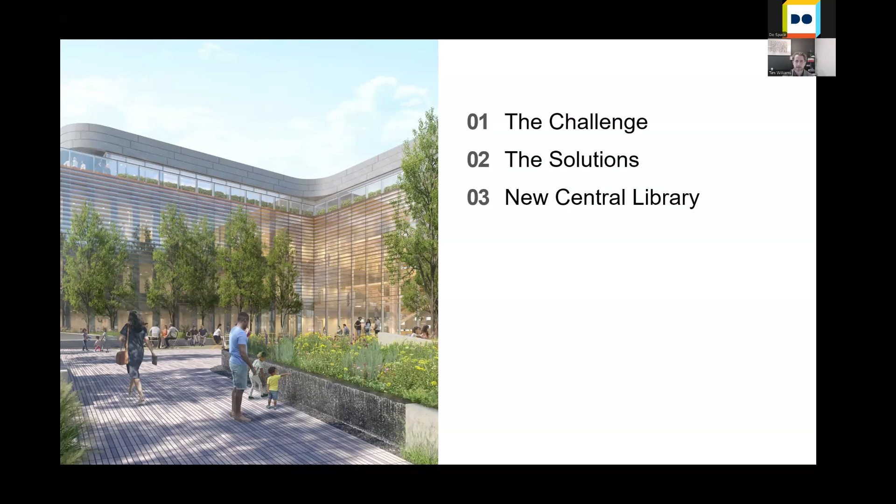So the first part is kind of the doom and gloom, what many of us are familiar with—all the challenges that come about with all of the climate issues taking place, especially in the architecture, building, and construction industries. Buildings and their operations and the materials that go in them account for about 40% of all global CO2 emissions. So it's a huge impact based on what we choose to put in our buildings and how we operate them. There's so much that can be done by further addressing this.

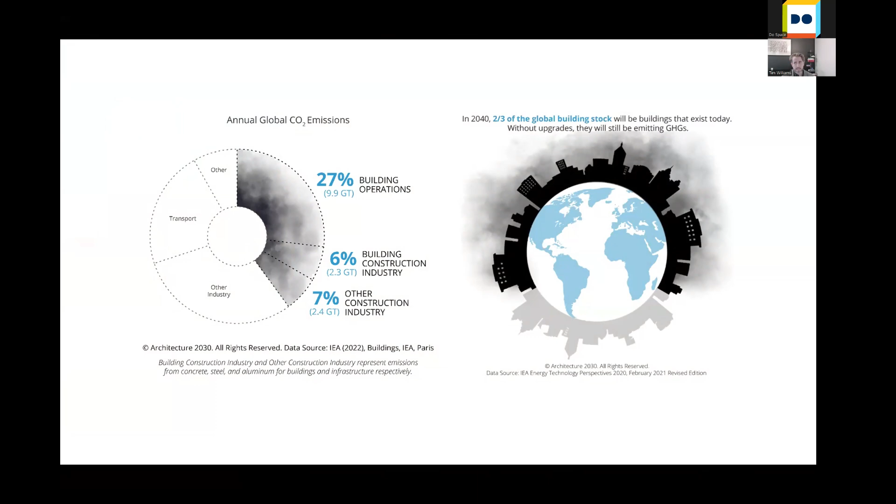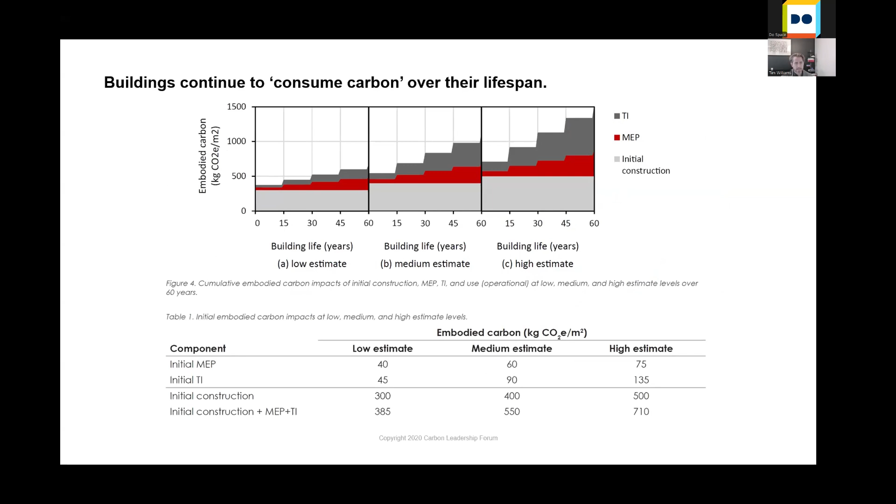Buildings even continue to consume and emit carbon throughout their lifespan. They will be renovated, there'll be new materials brought in. It can have a huge impact throughout the life of the process.

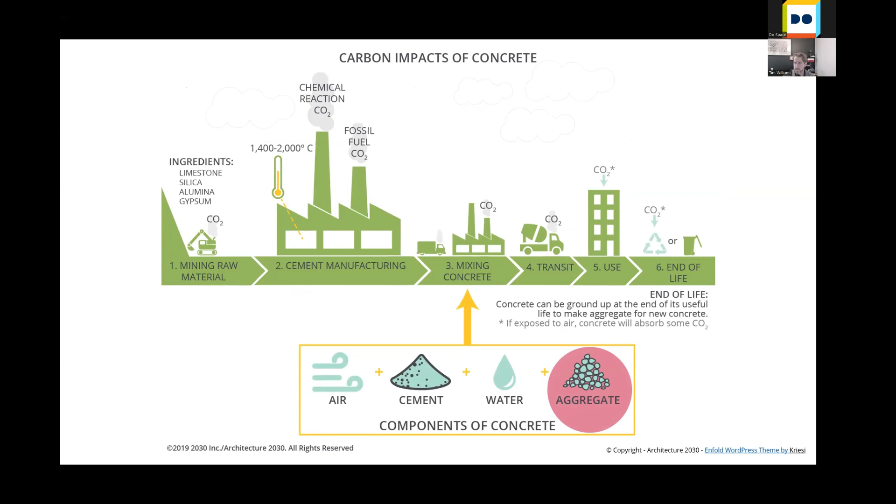Concrete itself is one of these inherent materials that's a major player in just about every building, and it's one of the largest producers of greenhouse gases. It's 8% of all global greenhouse gas emissions, just from concrete. Second to that in our industry is steel as well, which also has a big impact. Although steel is getting to a place where they now have much more efficient furnaces that allow them to cut down on some of that CO2.

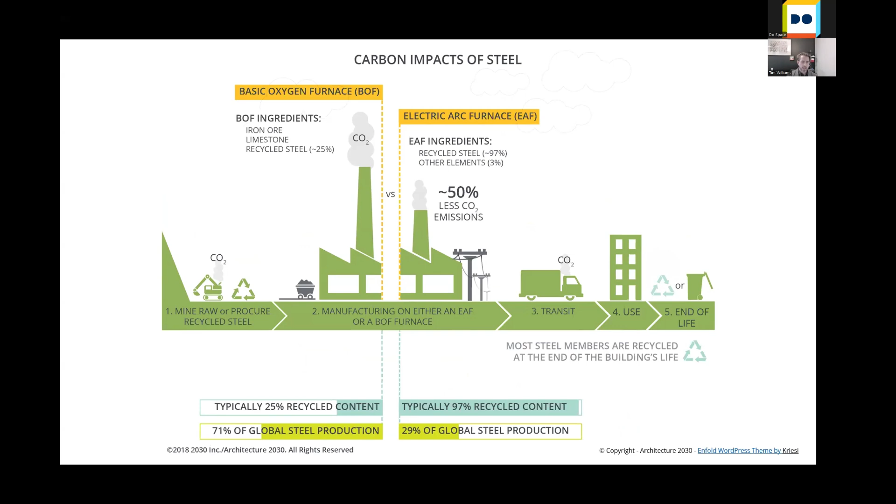So I'm not really just talking about the material itself. It's about the CO2 emitted when they mine the raw material, when they're manufacturing it, when they're transporting it, and when it's at the end of its life as well. So it's thinking about the entire life cycle of a material product.

So just kind of very high level, how we're beginning to, as an industry, address and begin to look at some of the solutions that are out there, or pathways for us to begin to correct some of these issues. I'm going to talk about three of these.

There's a lot of different standards and systems out there that speak to wellness and health of buildings and the sustainability of them. But I'm going to focus on three, the first being the AIA framework.

The American Institute of Architects is one of the big licensing bodies within the industry. HDR is a member firm of the AIA, and we're really committed to the code of ethics that they bind us by.

In the same way a doctor has an oath to do no harm, we've also signed on to the responsibilities of ambitious climate goals, optimizing water consumption, incorporating healthy materials, minimizing unhealthy ones. How can we restore ecologies and habitats? Can we incorporate resilience strategies while minimizing environmental, social, and economic impacts?

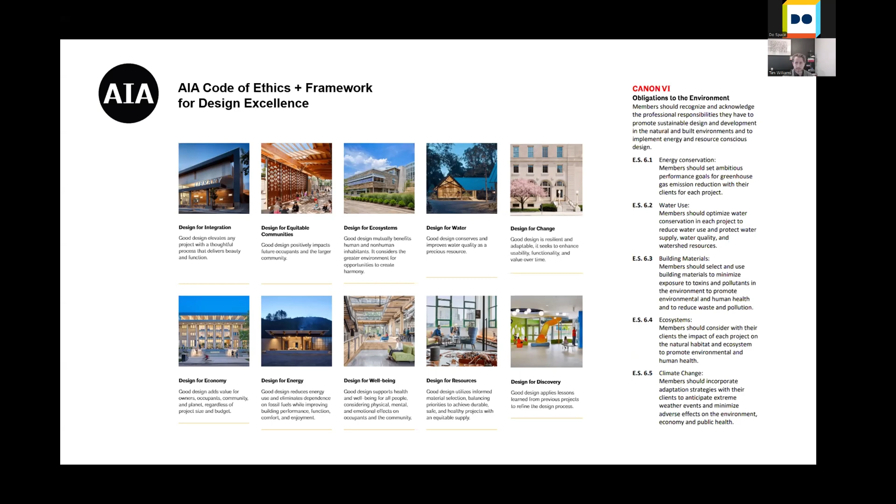The next one, at a high level, is something called net zero, sometimes called net zero carbon, sometimes net zero energy. This is about what if we could totally eliminate the carbon impact that buildings have on the built environment. A key part of that is this net zero idea: it's not about eliminating carbon from the entire project, but offsetting it or finding ways to generate additional energy on site to begin to pay back, in a way, the carbon required to create a project.

There's also this idea of using materials in a project that capture some of this carbon, not in a manufactured way that releases it into the air, but materials that are actually made of carbon and soak it up, so we can use them in the buildings themselves. They end up as a negative versus a positive release of carbon dioxide.

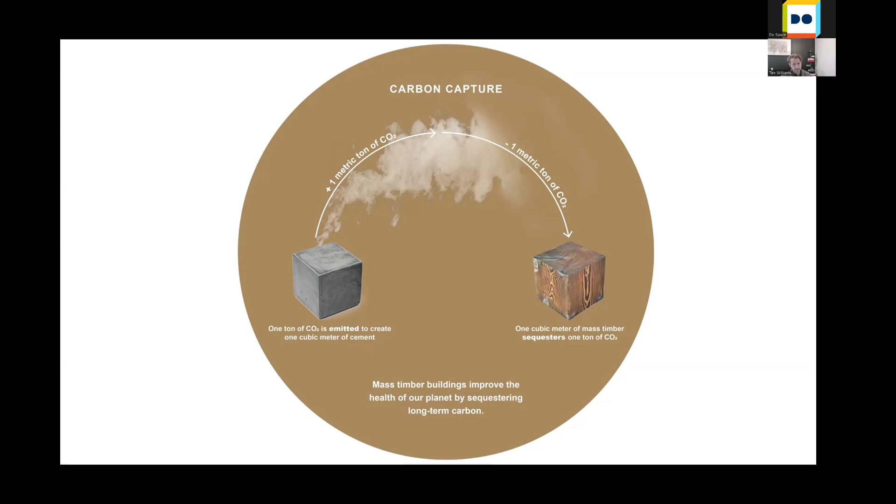One of the best ways to do that is trees. Trees breathe in carbon dioxide and output oxygen. That's how trees work, and as part of that process, they themselves are heavily made of carbon, which we can use in the building industry to create a building that actually has a negative carbon impact.

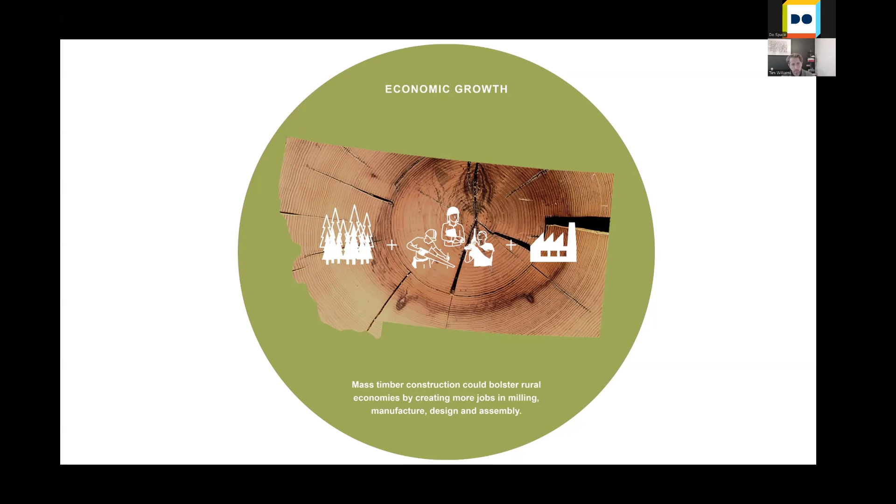The whole industry of trees and forestry is well-known, and there are sustainable ways to harvest trees. I'm not saying let's go to the rainforest and chop down all the trees there, but I'm talking about Forest Stewardship Council provisions that look at keeping forests, planting them, and using them sustainably so you can continue to replenish forests while harvesting from them.

Wood is also really interesting in that even after its life cycle, it can be reused in other ways. Many times you can just reuse a piece of wood, or grind it up for industrial processes and reuse it in different manufacturing, like OSB or particle board or paper. There are other ways to reuse industrial timber, or even send it back into power plants that can accommodate this kind of fuel source.

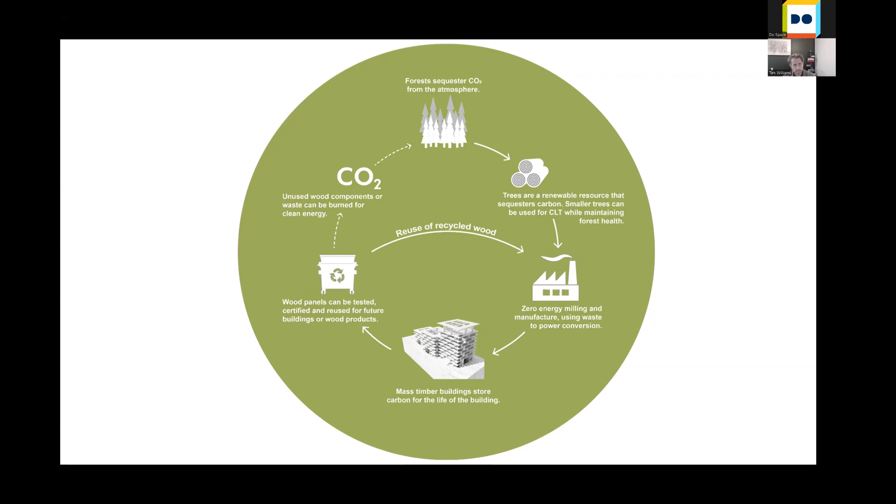And so there's even a step further beyond net zero, where you're not just balancing out but actually improving the built condition. This is the idea of a regenerative future, where you can actually have a positive impact by building a building on the site.

So many of you are thinking, hey, my house is already made of wood, am I carbon negative? It's actually a very different material in many ways. The light wood frame your house is made of is likely not the same as what we're talking about here, what's called mass timber, which is basically gluing together a bunch of 2x4s to make much larger members.

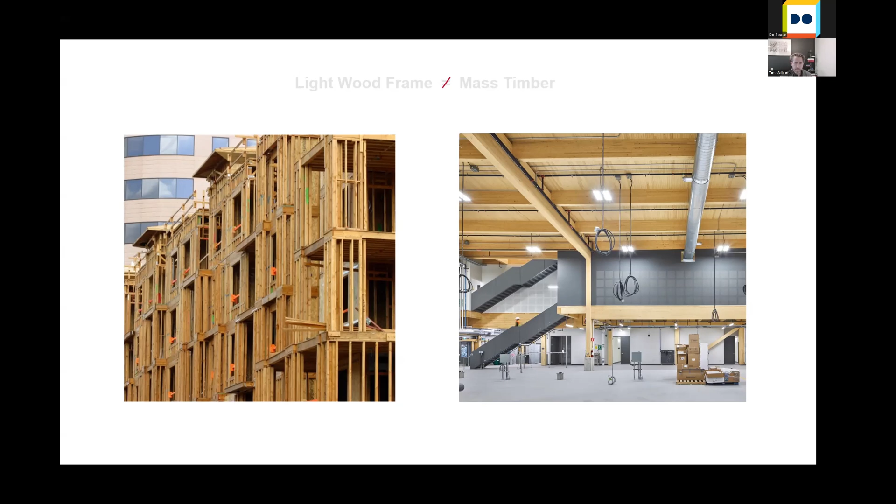And they do that to allow for the similar column-free environments that you come to expect from steel buildings or concrete buildings, to improve their structural performance. But it does also help with its fire resistance.

Fire would obviously be one of those first things, like, hey, wood burns, that's not good, right? But the interesting thing is when you get thicker with the wood, when it burns, it actually only burns that first several inches. What's left on the inside can remain as a structural element. So when engineers figure out how big a beam needs to be, they take into account this couple extra inches that are essentially allowed to burn away in the event of fire.

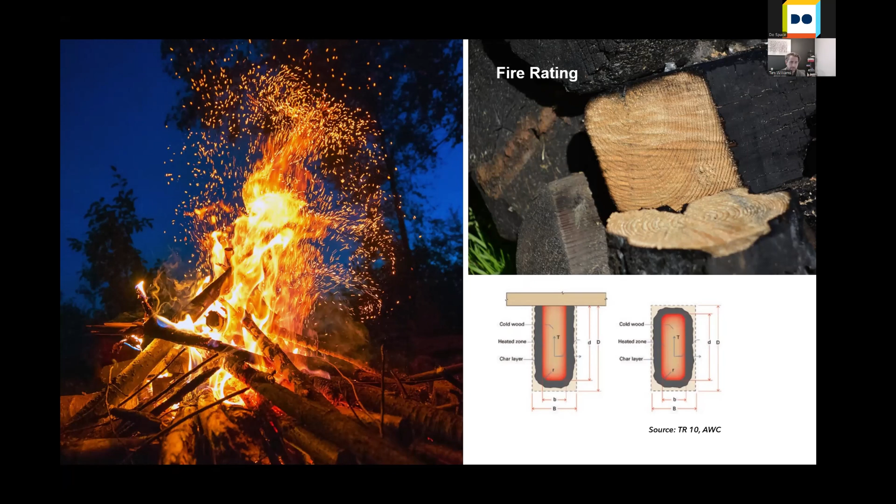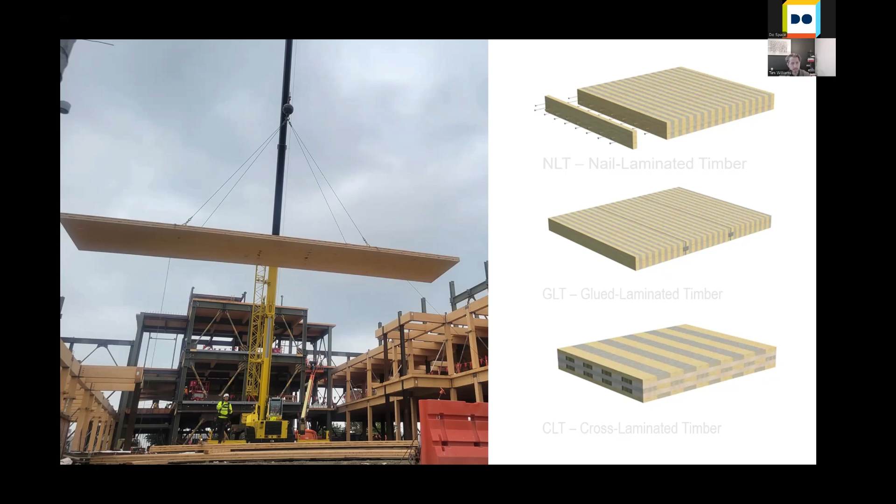So in many ways, wood can actually obtain equivalent ratings to what you get with steel or concrete buildings. And for the flat portions of the building, like the floor and roof, you can make it out of something called CLT, GLT, or NLT. These are all essentially giant plywood - huge layers of thick lumber instead of thin veneer layers you see in plywood. But they're all just more ways to take some of that carbon that would normally be released into the atmosphere, and actually embody it within the building, creating this negative carbon environment.

And this has a benefit - in many ways we still need to use concrete and steel in projects. You're not really going to bury wood as a foundation element, so we'll still rely on concrete. But timber is also quite a bit lighter when you build out the full structure than steel, which allows for lighter foundations. That means less concrete for the foundations of a building, which equals, again, less carbon.

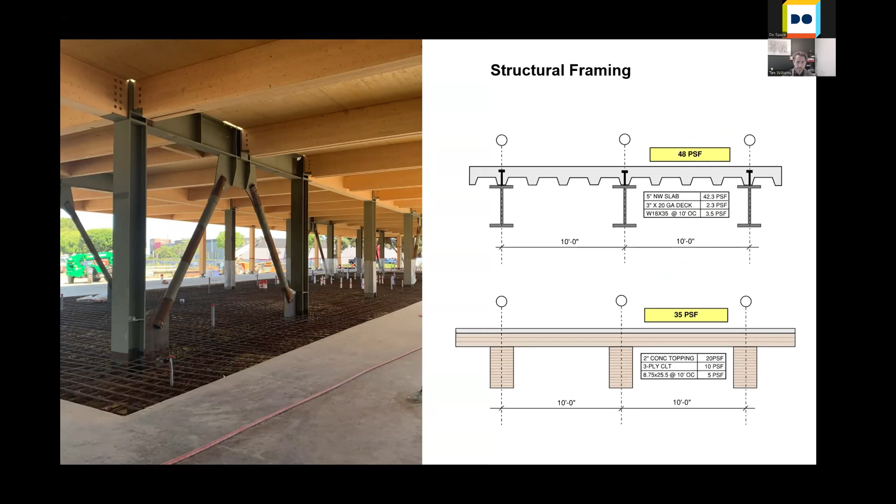So this is a kind of cool study that we did for a project. They wanted to evaluate the idea of what if we switch to a mass timber project. How do we end up? What impact does that have from a carbon standpoint?

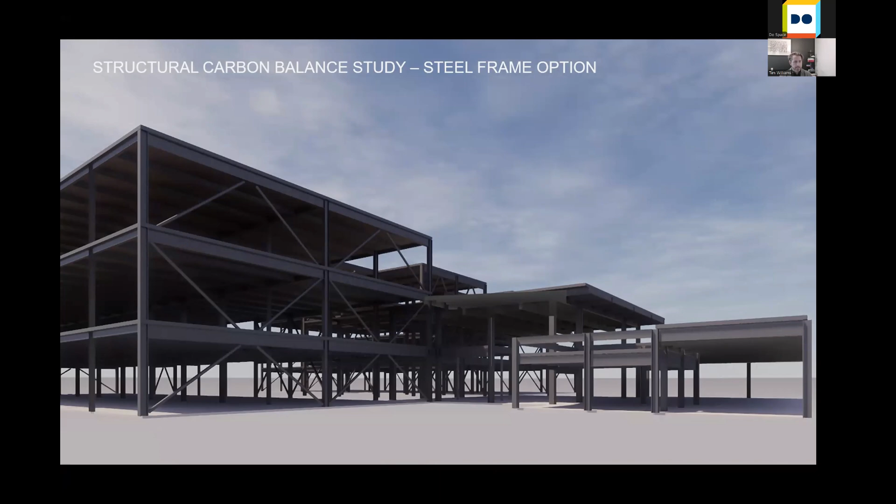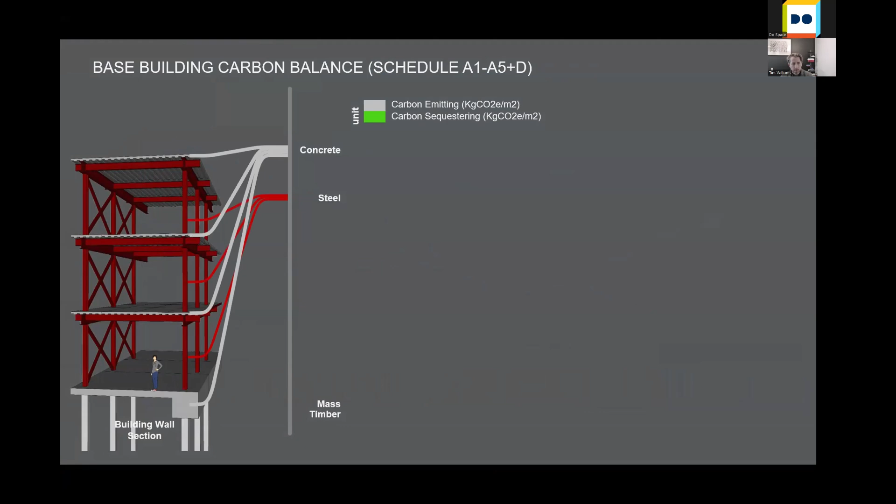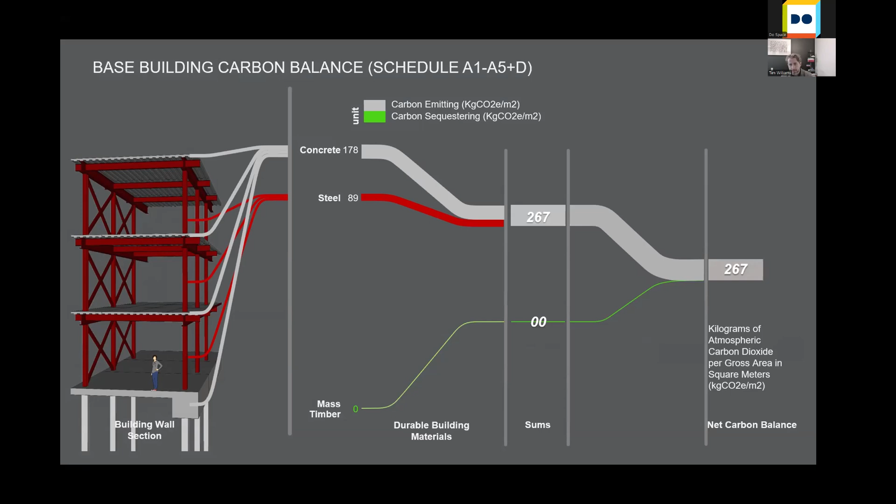So we did a base project that was just all steel, and then we looked at the carbon impact of each of those. We have carbon embedded within the concrete, carbon within the steel, and those each have a certain amount of kilograms of CO2 that add up to create this number - for reference, 267.

And then we went to evaluate what if we switched to this mass timber scheme, where we use a majority mass timber, but still using steel elements where required. This project was in California, and they have earthquake provisions there that in Nebraska and the Midwest, we mostly don't have to deal with. That's why there are these steel members, which could not be done out of mass timber at the time.

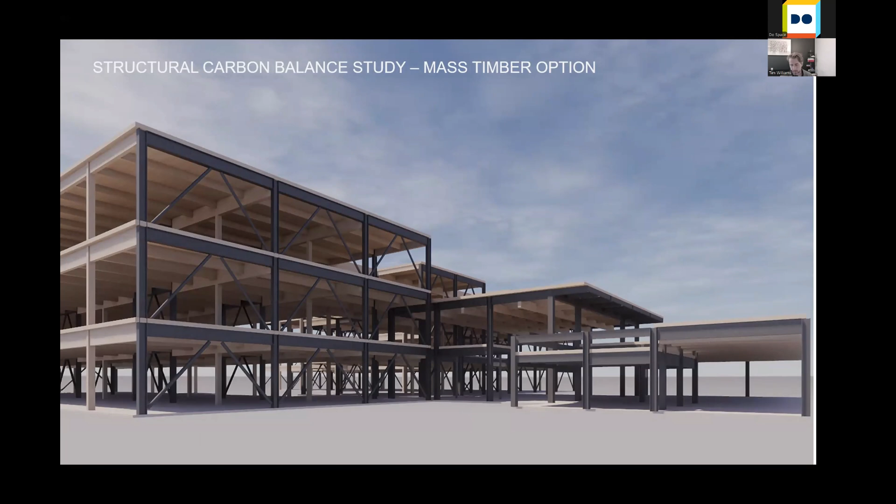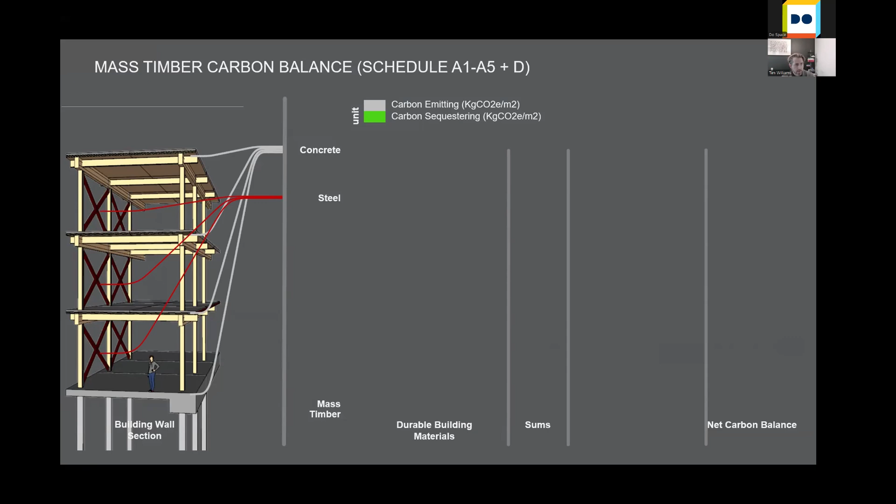When we began to really look at this project with mass timber, we still had a little bit of concrete. Mass timber usually has about 2 or 3 inches of concrete on the roof, on the top of the floor, and on the foundations, as I said. There's also some steel still left over within various miscellaneous areas. But then there's all of this carbon that's captured by the wood itself.

And when you really end up doing the math, the project actually ended up netting out to this negative carbon impact. So by building the project, it was actually resulting in absorbing more carbon into the built environment rather than releasing it into the air.

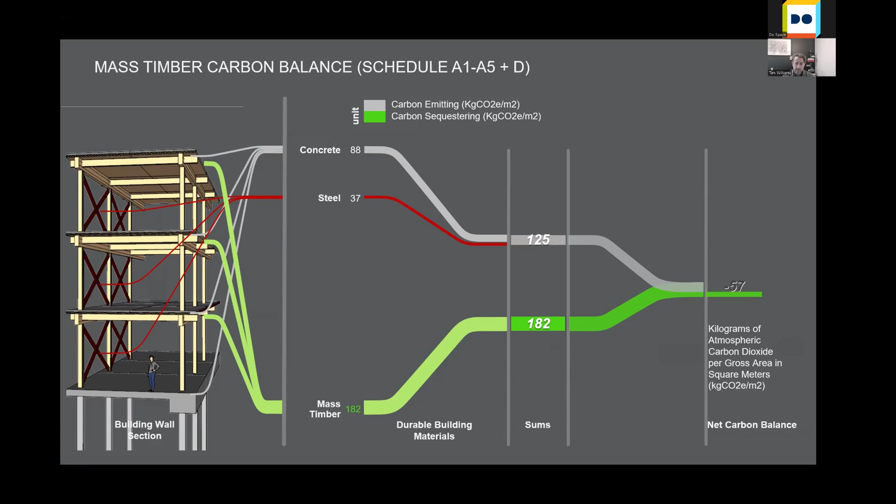And we're fortunate in Omaha to really benefit from some of our colleagues up in Canada and the Pacific Northwest, where mass timber is a very common way to build and incredibly cost effective. They've done over 70 projects, and we've been fortunate to really tap into these industry experts and utilize them on some other projects.

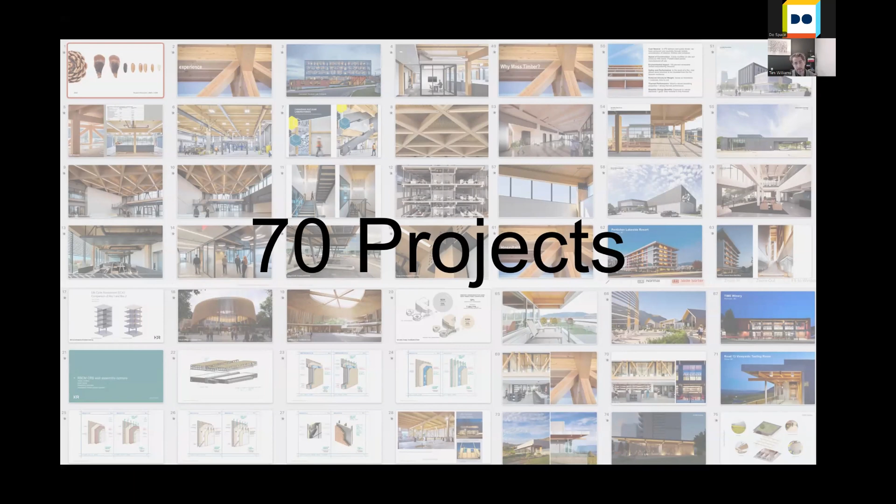So recently, we were given the opportunity to do an addition to the College of Architecture at the University of Nebraska in Lincoln. And as stewards and educators ourselves at the college, teaching this future generation this kind of - I'll say new style of building, but really it's a very traditional way of building - mass timber was a perfect example for that.

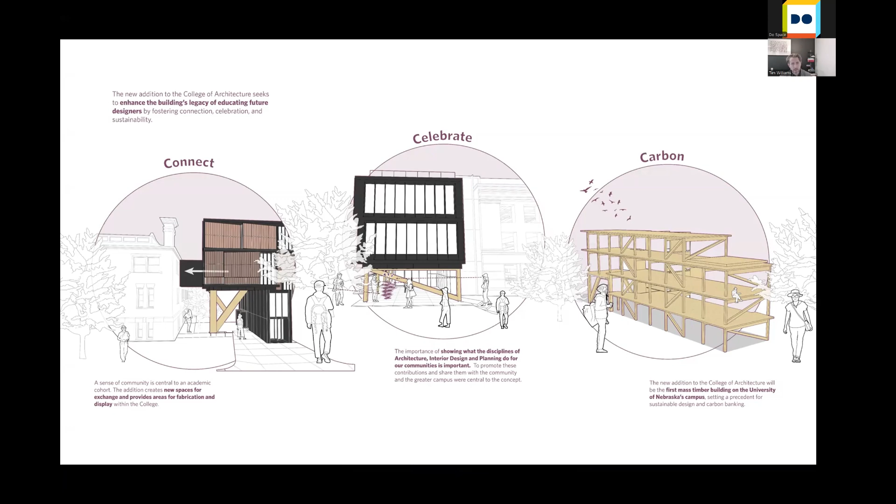So I just want to share some of these projects that was recently completed. I'm sure many of you have walked by it on the way to the football games. It's a small addition, but very impactful and has a huge presence on the site.

One of the benefits of mass timber as well is it has a faster erection cycle. So you can essentially build a mass timber building faster than you can a steel or concrete building. That was a huge bonus for the university because they have deadlines - students coming in at a specific day in the fall, and you need to have the project complete by then. So having a fast construction schedule really helps with that.

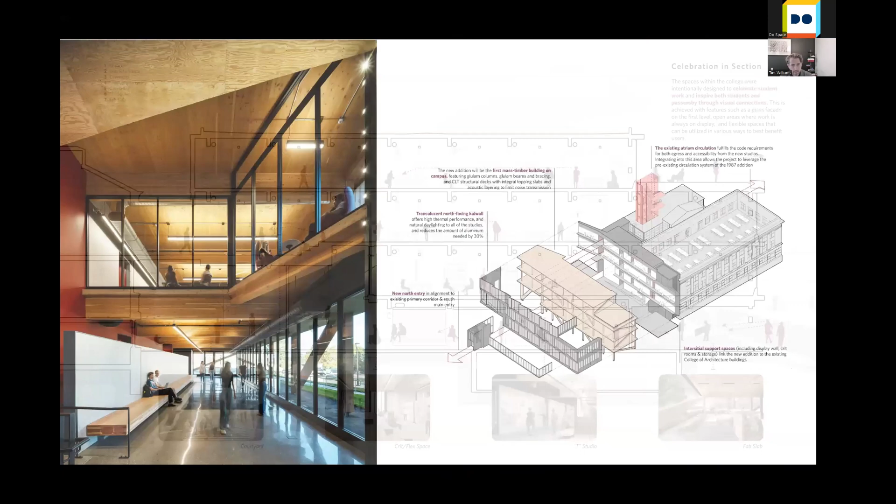And I think one of - I've just been talking about the carbon impact of mass timber, but it's also a really beautiful material inside of a space. We often can just leave it exposed. You're not going back and painting it and putting drywall on like you usually do with steel and concrete or other structural materials.

And we completed one in downtown Omaha just recently at 1501 Mike Fahey. This one is a commercial office building, so it's not an experimental architecture building. This is a real world project that really saw the benefit of investing in creating mass timber portions of the building. So the lobby and some of the ground floor spaces and the perimeter columns are all mass timber. It's an incredible environment.

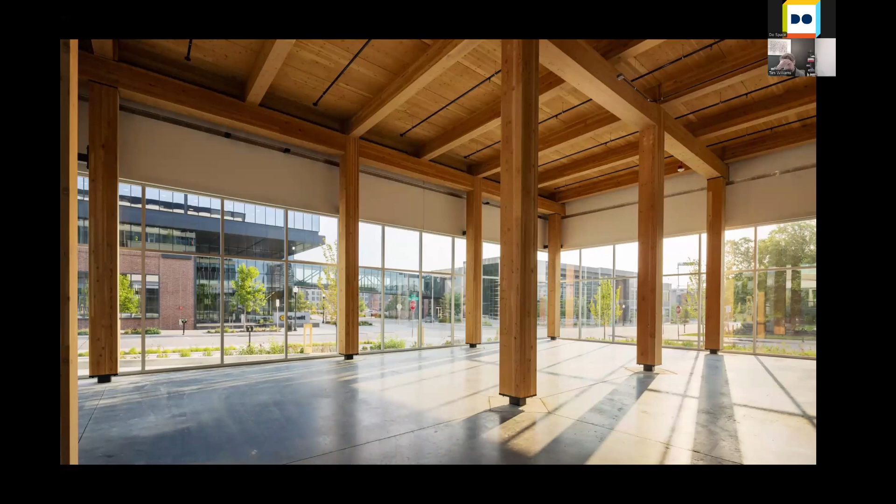So the last of the systems that I'm going to talk about is called LEED, Leadership in Energy and Environmental Design. It's a system set up by the USGBC, a private organization that has advocated for sustainability and certification of individuals and projects to promote sustainable buildings. It does say USGBC, but it's actually a worldwide organization. They certify projects all around the world, and they really are the leader at the moment in terms of the standard for creating sustainable buildings.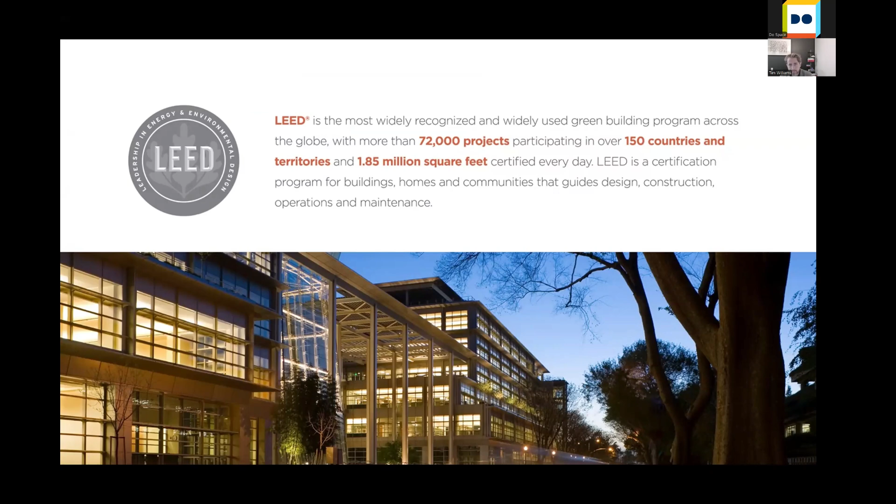It continues to reinvent itself. They're on version 4 now, so they continue to evolve as codes evolve, as the law evolves, as the entire practice of architecture evolves in building and maintenance. And they break it out into five different rating criteria: BD&C, which is building design and construction, interior design and construction, operation and maintenance, neighborhood development, and homes.

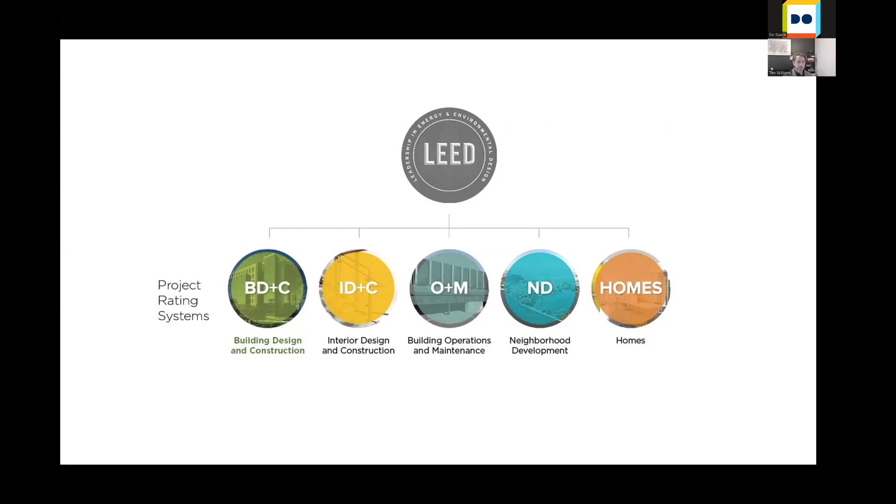And so if a project is pursuing it, they're usually going after just one of these rating systems. Within each rating system, there's a range of categories that you can earn credits within each of them. By earning credits, more credits equals more sustainable in a high level sense. So they call this a scorecard, and it's essentially a yes, we're achieving this credit, no, we're not. And you add up the points in the end to begin to see where you're falling.

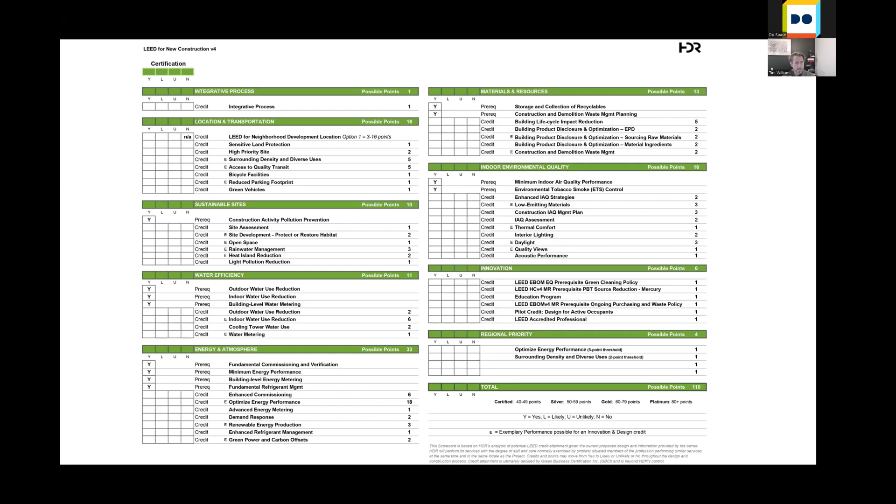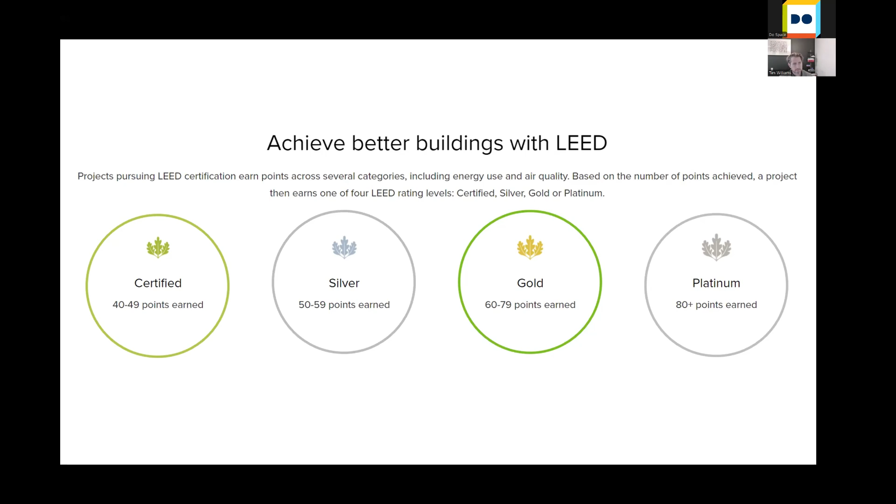So, for example, our headquarters building that I'm in right now in Aksarben in Omaha is a LEED Gold project. Let's go to this slide. It's a rating system of four different levels, with certified being the lowest number of points you've achieved. Silver, gold, and then platinum are the kind of exceptional projects. There's very few platinum projects in the state of Nebraska, but I did see that there's about 90 projects in Nebraska that have achieved certified or above, which is pretty good. And so our headquarters, as I was saying, achieved LEED Gold through this same kind of process.

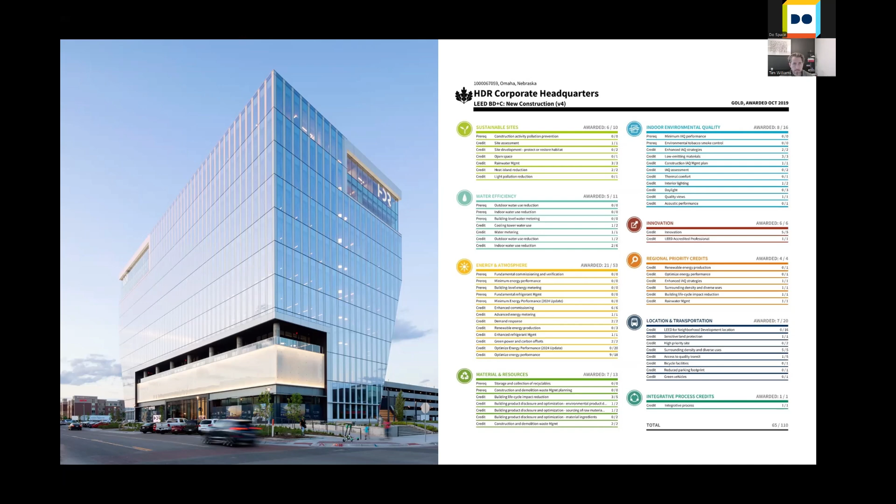And you can go online on the USGBC website, and you can search for other projects nearby. You can pull up their scorecard and see how they achieved their rating. And at the end, when you get it, maybe you've seen these in some buildings, you get this kind of little plaque that's often hanging in the lobby where everyone can see it.

And so that brings us to where we are, the new Omaha Central Library. We've learned about rating systems in general, strategies for building more sustainable projects, and LEED, and that became the primary system that we decided to strive for on the Central Library.

So the Central Library is, at a high level, a project to relocate what was the Central Library in downtown Omaha and bring it to essentially the center of the city at 72nd and Dodge, using the site that was previously occupied by DoSpace and Borders before that. So it's bringing this DoSpace, which was essentially almost an Omaha Public Library branch though not formally, and making it part of this project as well—moving the administrative portion, creating this new central administrative branch, and wrapping in DoSpace within that as well.

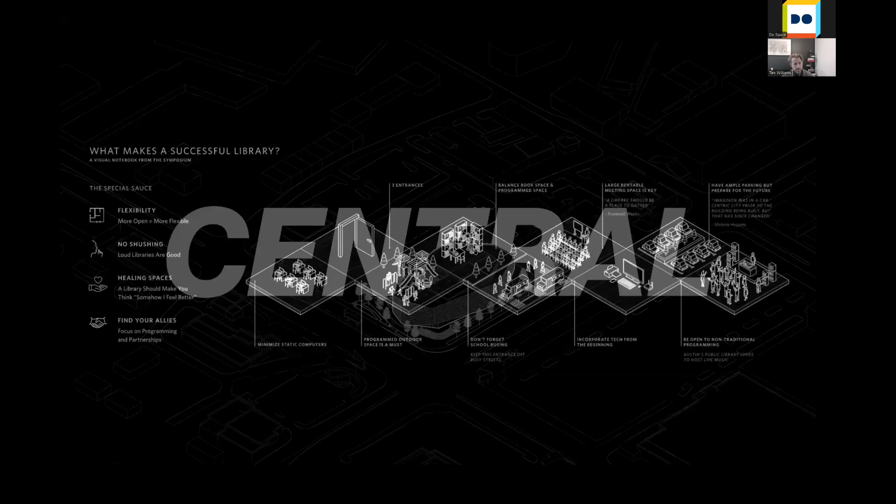And it's a project to also redefine what a library is. Libraries have changed a lot since probably our last library in Omaha was built.

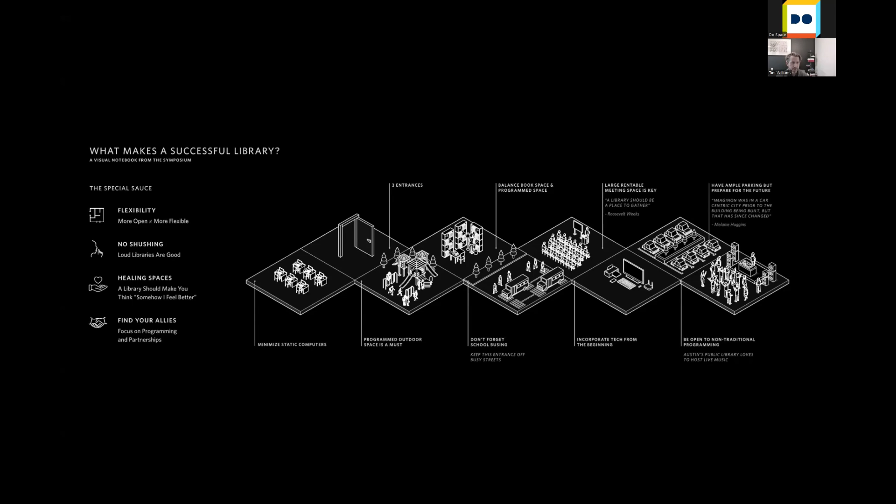They've changed, and they're not really about the kind of spaces where you're just hushing people and saying be quiet and going off to quietly read. That's not the only thing you're doing, but there's a huge range of diverse media that people are consuming and sharing now. They've become the community spaces where people can come together socially in a public forum. It's really kind of the living room for the city, with literal couches where you can come sit down and have a coffee.

72nd and Dodge has also got an interesting past that sets up for an interesting future. By placing the building here, it really set out from what was taking place, what the library was looking to move their administrative offices to somewhere around this area. This is a really interesting site that allows for more public engagement, especially putting it on such a prominent corner where there's a lot of activity.

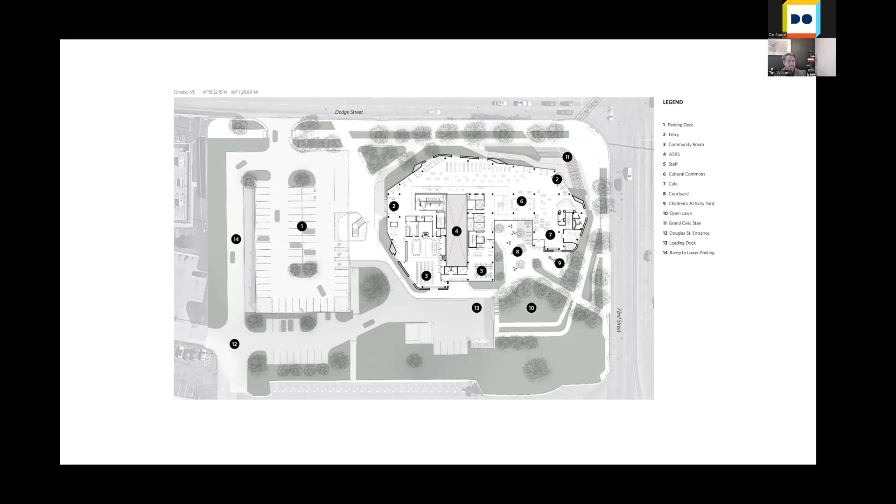I know the DoSpace folks, you all know it really well. We've really been looking at creating a building that not only sets out to have a totally new interior and programming, but also the outside reflects this totally different take on what a library could be, to reinvigorate and add this kind of spark to what's possible inside, and redo your preconceptions you may have.

Of course, a huge part of libraries is also making sure everyone is welcome. It's truly a place where everyone can come in and find something that they're interested in. There are so many different types of spaces within here that I think there's something that will make everyone find their own spot.

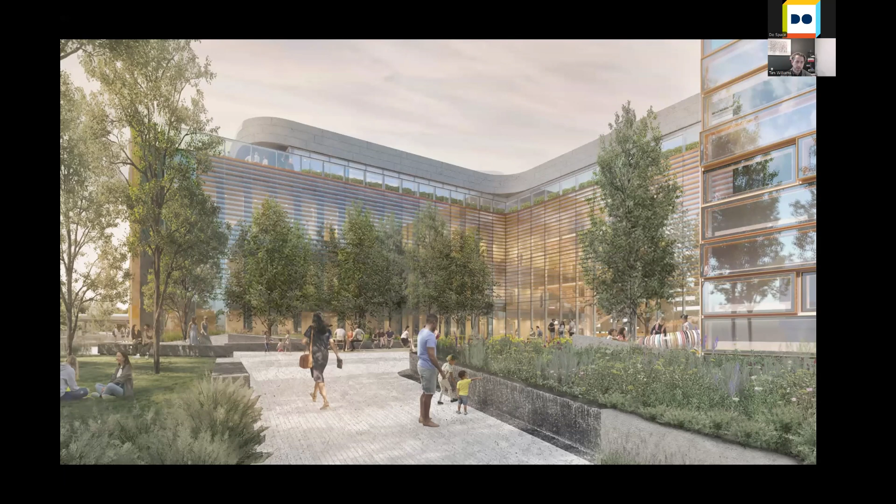And there are spaces that are outside too, not all of it's inside the building. There's a courtyard on the south side of the building that will allow for more of a plaza experience, as well as an outdoor children's playscape, and even a grassy terrace for people to have outdoor reading events or just meet some friends.

There's this really interesting aspect that it's also kind of a first. The library has taken this idea about utilizing new technology, something called an automated storage and retrieval system, which we often call the book bot. It's actually two giant robots that store books on shelves within the heart of the building.

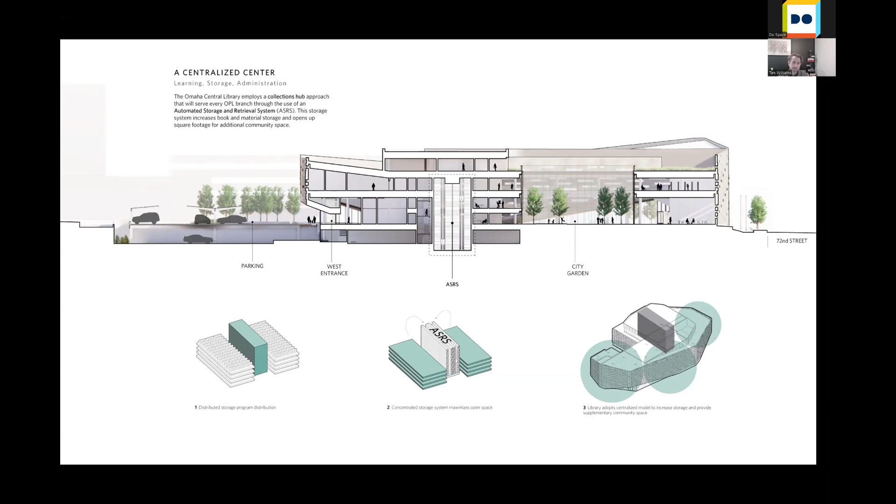This is really a place for them to store books that aren't frequently visited or checked out, but it also allows for rapid retrieval of books if they are called up. So within several minutes, you can call up a book on one of the devices and have it available at a counter for you to reach.

This is one of the systems in place at the Hunt Library in Raleigh, where they were using a series of these book bots to store their books and other media. The Omaha Central Library is going to be the first public library to have a system like this, although it is widely used in university libraries across the country.

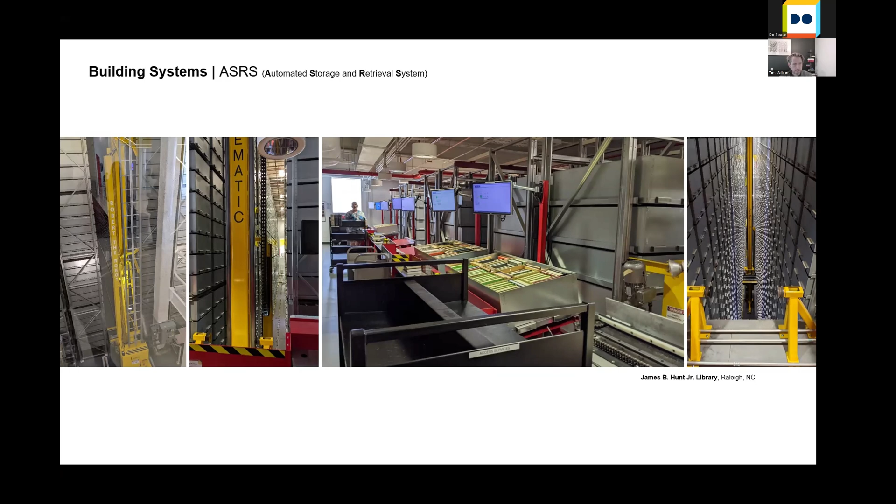It's also very popular in many shipping and storage warehouses. But what it also does is allow us to build less of a building. If anything you've learned so far, it's that building any square footage usually results in a less positive impact on the environment. So by condensing all of this to a smaller footprint, it's allowed the building to be smaller, because we don't have rows and rows of archival shelves that aren't accessible to the public, but instead something in the heart of the building that people can get to.

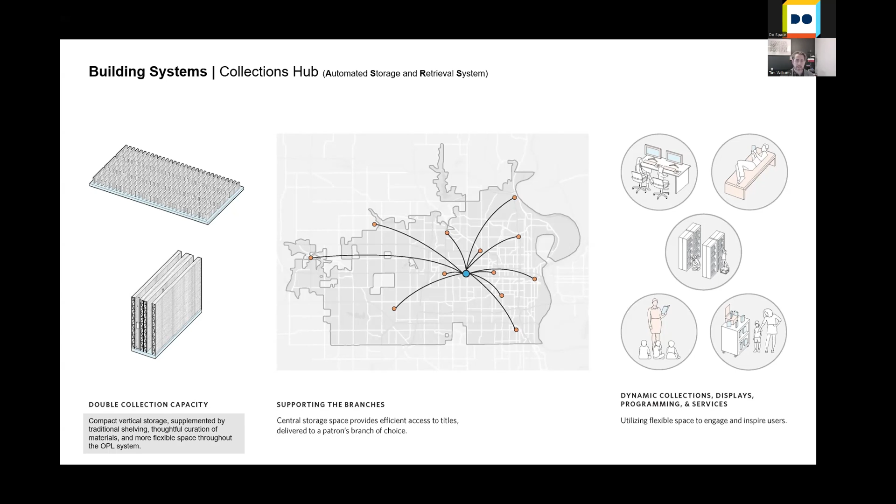It also has the added benefit that now the other branches are able to store some of their stuff in the central library, which frees up space in each of those branches, allowing them to create more of these dynamic programming things that are in demand. When you bring it all together, it creates this really interesting free space available for different events that can take place at the library. So the ground floor, the first floor, still has books, still has plenty of books out to see, but it also has a lot of open space. So speaking about the living room of the city, it allows the first floor to be like that.

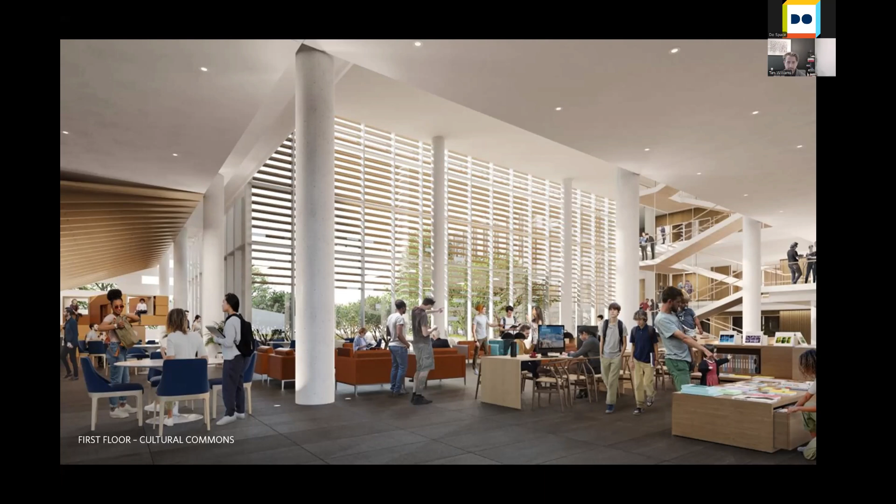So when we think about LEED and how LEED applies to the project, we are going down the building design and construction path, so that's essentially new buildings. I'm going to talk through some of the different categories we're targeting to get credits from.

Location and transportation is one of the categories, and we're benefiting from access to public transit. Omaha doesn't have a lot of public transit, so building a project adjacent to these stops really helps us, especially for LEED credits. With the ORBT bus stops on Dodge Street, that really helps tie into more sustainable ways of accessing the building.

Additionally, there's plenty of bicycle facilities available for people arriving by bike, and EV charging will also be available. We have a reduced parking footprint, so there's a small parking garage with a reduced footprint compared to what's often seen, and we benefit from the diversity and density of the surrounding area.

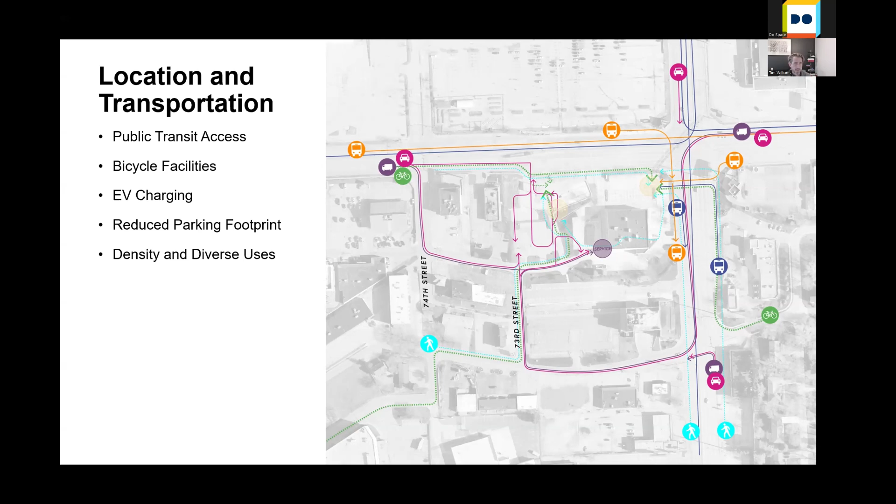One of the positive things is there's so much happening in this area. You can walk across the street and find Chipotle, Starbucks, a Target across the street, and other businesses nearby. So within a close area, we're able to obtain some LEED points by having a project like this. A lot of these things aren't really our decision as architects, but they do benefit the project by choosing sites such as this.

Energy and atmosphere—this category brings the most points to our total score. It has 33 possible points that you can achieve, and a big part of that is the energy efficiency of the building.

Right now our project is achieving 16% lower energy use than the Omaha code. We've reduced the energy usage required through a variety of strategies I'll talk about. We've reduced natural gas consumption by about half, and we're even beating the LEED baseline building by about 30%. We've spent a lot of effort to really improve the energy efficiency of the building in a variety of ways.

We also have commissioning, where experts come out to ensure systems are set up correctly—is your mechanical system actually functioning the way it's supposed to, is the exterior of the building leaking air, or is it performing the way it was designed to. This helps get the building set up properly.

We're also targeting the enhanced refrigerant management points, which is about more efficient use of refrigerants. The challenge there is refrigerants are often very harmful to the environment when released, so keeping them reduced is essential.

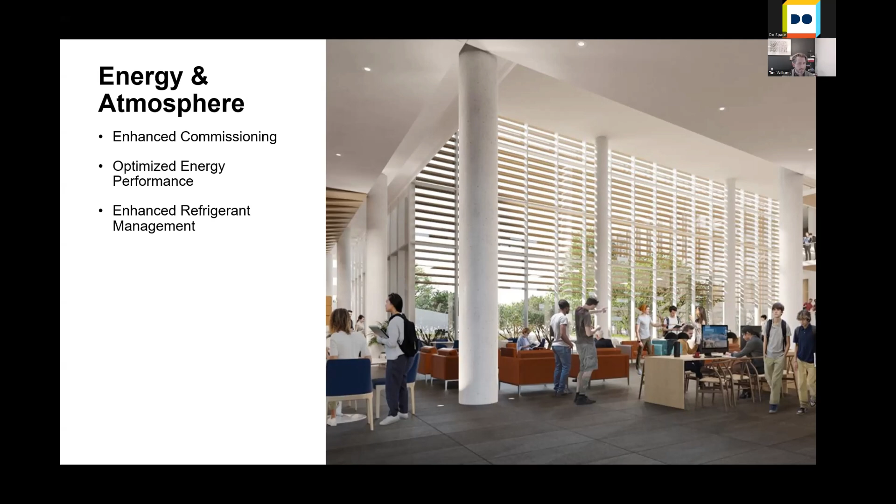A big part of that, and a really unique thing on the project, is this underfloor air distribution system. We have a lot of very big volumes within the building, part of creating that public space feel, and a high ceiling makes it very difficult to deliver cooled and heated air down to someone on the ground. But a very efficient way of doing it is by actually feeding it from the floor itself.

That allows for little adjustable grills on the ground that can be tweaked or changed so people can adjust the air distributed to them if they're not feeling comfortable—just like in your car, you can turn off the little fan if it's giving you too much or too little air. It's the same thought, but it also has a huge benefit to the library and the way they want to operate and run the space. It allows for more flexibility.

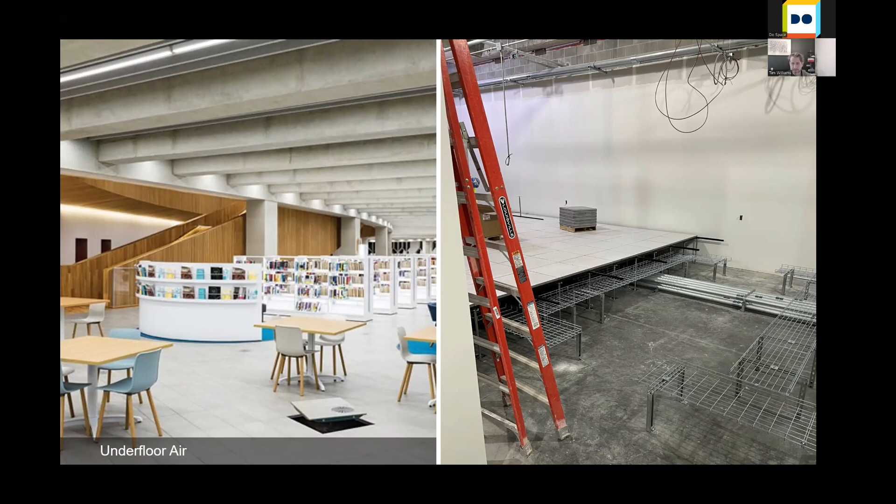So it's a very sturdy system, which is something that one may not intuitively think.

Another huge benefit to the energy performance is what happens on the exterior of the building. For all the vision glass on the building, all the windows, we're using triple glazed glass, meaning there are 3 layers of glass with cavities of air between them. That allows for much more efficient energy performance of the building. You're not losing heat through it in the winter, and you're not losing your cooled air in the summer. It's really keeping the outside where it wants to be.

It also has a really deep, thick facade that allows for additional insulation and also provides some shading on itself. So it's kind of shading even before the light gets within the building.

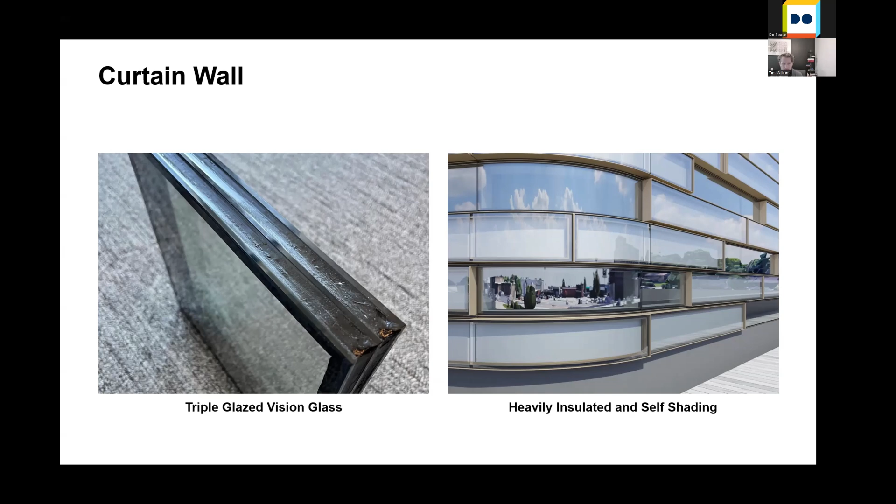It's an incredibly unique facade design that, if you've driven by the site, you're beginning to see. It's really a collection of these small windows combined with another layer of glass on the outside to give the effect of this kind of morphing glass building, which is also really important in how we provide natural light inside.

Providing natural lighting is also some more credits you can achieve if you obtain a certain score, reducing the glare inside. We've designed some sunshades that go on some of the big open glass areas that face south, to cut down on any glare coming inside. And then quality views is another area where we're targeting some LEED points, so we want people to look outside at good things.

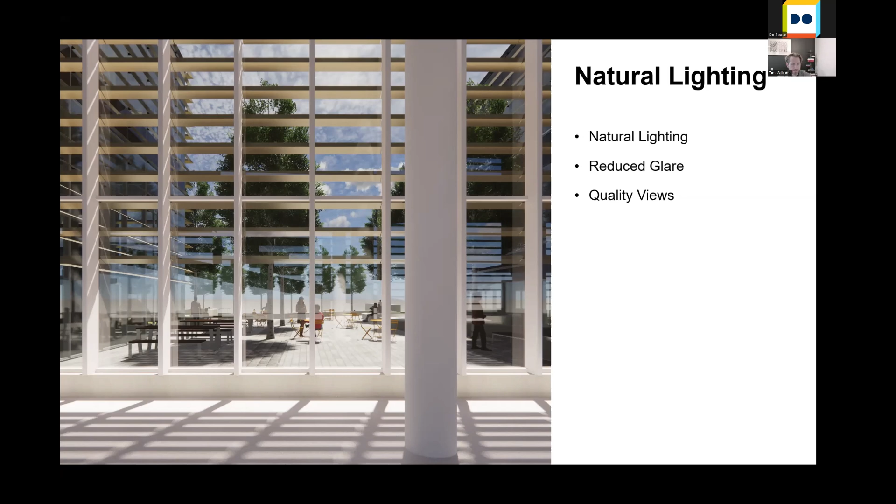Each of these things isn't really just like, yeah, that looks good, I think we're there, we'll check that box. They are actually really rigorously studied, and we have brilliant engineers working on things like this to look at and evaluate different design options and how the building is performing from all of these different metrics.

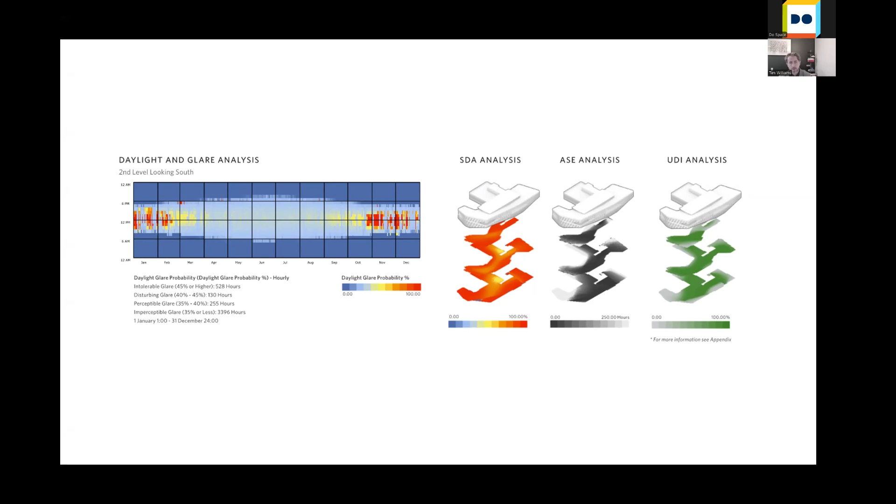So how much can the building stand without needing any artificial light within it? Or is it obtaining plenty of light from just the outside? Or is it getting too much light from the outside and we need to cut down on some of it? These are all really key metrics that we track throughout the project.

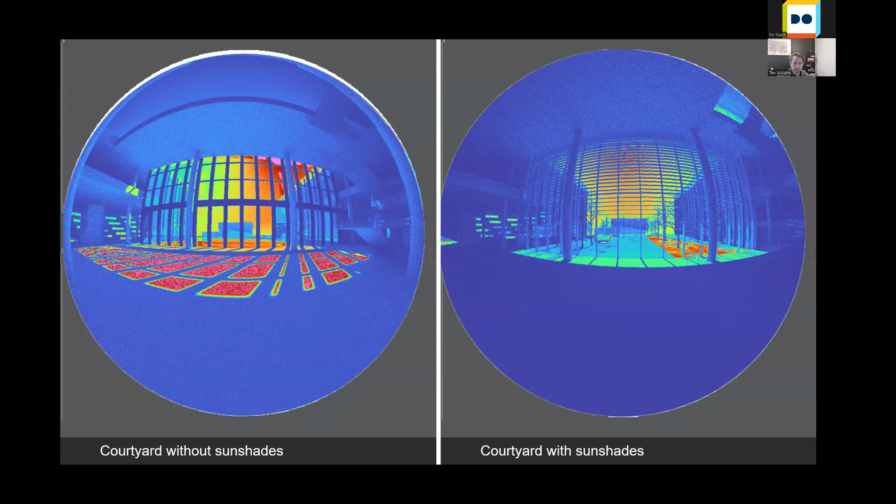We evaluate different design decisions, such as the sunshades I was talking about. We looked at first not having them, as you can see on the left, but it made these areas basically going to be cooked if you were sitting there for a long enough period of time. In the summer it might feel really warm, but by adding just these small sunshades on the outside, it's really cutting down on the glare that comes within the building.

We evaluate it in a lot of different software. This was very early in the project, but we continue to use it throughout.

It's also important to provide the ability for people to move throughout the building and live an active lifestyle. By having publicly visible stairs within the project, you can obtain LEED points for that. It promotes people's own health for those that are able to use the stairs, but it also cuts down on elevator electrical requirements, so you're having less impact there but more activity here. And it's not just about the egress stairs, the escape stairs surrounded by concrete block, but about putting stairs in big visible public spaces, so you can walk around and see other people walking around. It creates this kind of visual connection and ease of transiting throughout the space.

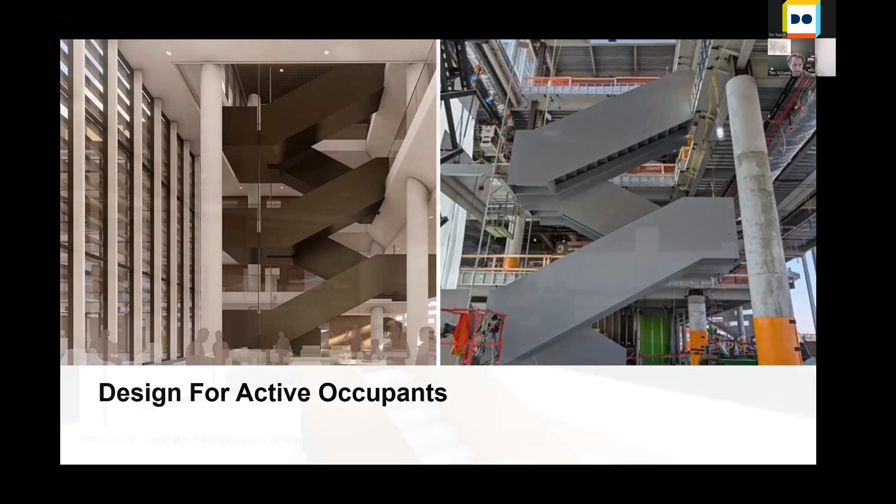So even the stair, some of the materials we've been looking at are also these kind of tactile materials such as wood, to promote and really try to encourage people to use the stairs for those that are able.

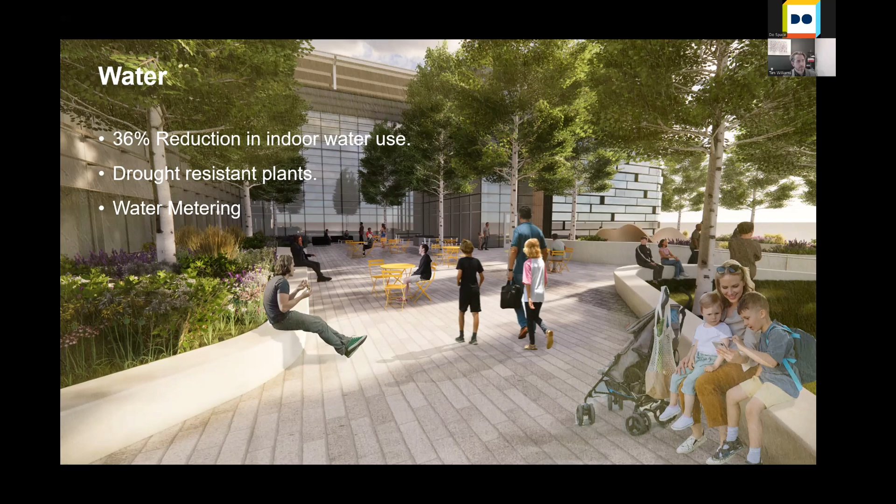From a water perspective, I don't want to show any photos of toilets, but it's a key aspect of actually achieving water reduction by having really efficient fixtures throughout the project. Efficient toilets, efficient faucets, all of these help contribute to a reduction of 36%, which is where we're at right now. On the outside of the building, we have drought-resistant plants, which really cuts down on any irrigation required throughout the project. You also get credits for metering your project.

Here's this kind of outdoor green space I was talking about earlier. A lot of native plants throughout the garden means they don't have to get out there and water it as much, a lot less maintenance, but also can be really beautiful.

Back to the inside, some of the key impacts we can obtain is by choosing low emitting materials. That means VOCs, or volatile organic compounds, which are essentially slightly toxic fumes that are emitted. We all know the feeling if you've unrolled a new carpet or something like that, these smells can have a negative impact on our health. So the design team specifically chose materials with low VOC content, which is a big part of creating environments that are actually healthier for people inside.

And EPDs, or environmental product declarations, are essentially forms that material product manufacturers create, and you can actually go search for them. You can search for some carpet supplier's EPD and their global warming potential, and find the kilograms of CO2 that each product releases into the environment. So all this data is actually out there. By using these EPDs and having everyone submit them for almost every element on the project, it allows us to better track and understand the implications of choosing different materials.

So that's kind of throughout the interior. There's a lot of wood, which also relates back to the earlier points about carbon sequestration and reducing environmental impact, that plays a big part in it.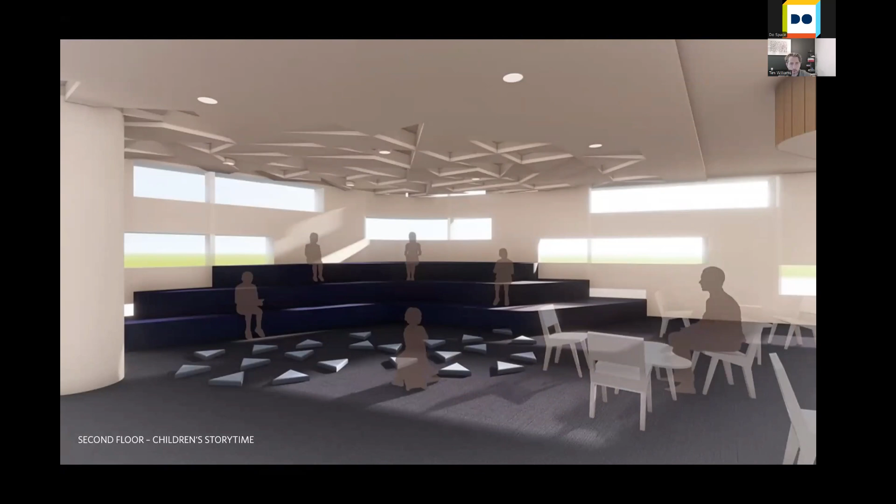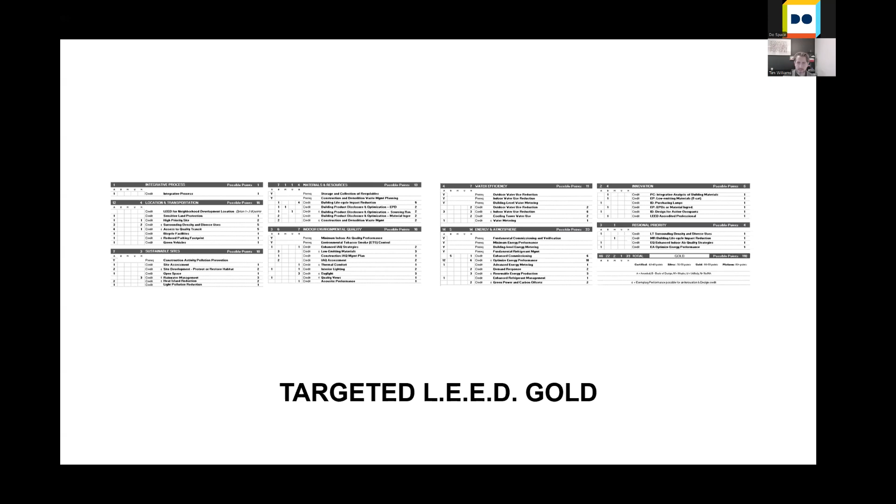So we are targeting LEED Gold. I say targeting because it's never really done until the project is totally complete and they've come to review the project itself. We're hoping to achieve LEED Gold, and we are on target to do so. A lot of the project is complete, so I'd hope that we're in good shape at this point, but I don't want to jinx anything.

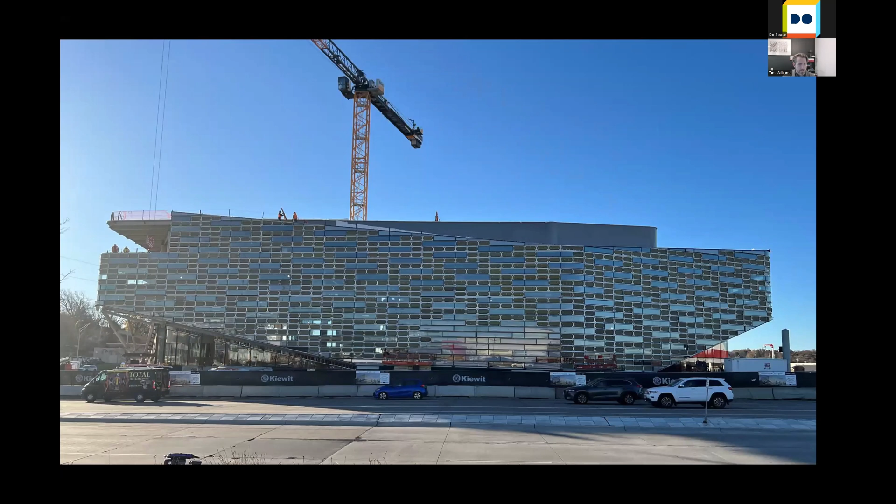We've been excited to be involved in this project, and I just wanted to share some images at the end. So these are early computer renderings, but I just walked by a couple days ago and it's coming to life. It's really cool to see them beginning to quickly put this curtain wall on. Things changed just in a couple of weeks, and I believe they're going to be wrapping up the entire curtain wall before Thanksgiving.

Some more views of the project as we look from the west at the entrance. I like these kind of aerial views. You can begin to see this is the southwest corner of the project. The parking garage is to the left, and in the bottom middle is the book drop - there's a window there for drive-by dropping off your books or picking up books or maybe even 3D printers, whatever you need.

A view of the south. As I mentioned, some of the glazing is much more open, so looking out at the views of the courtyard and the nature outside is an important part of creating that experience. But here you're not seeing the sunshades - those won't be put on until the very end.

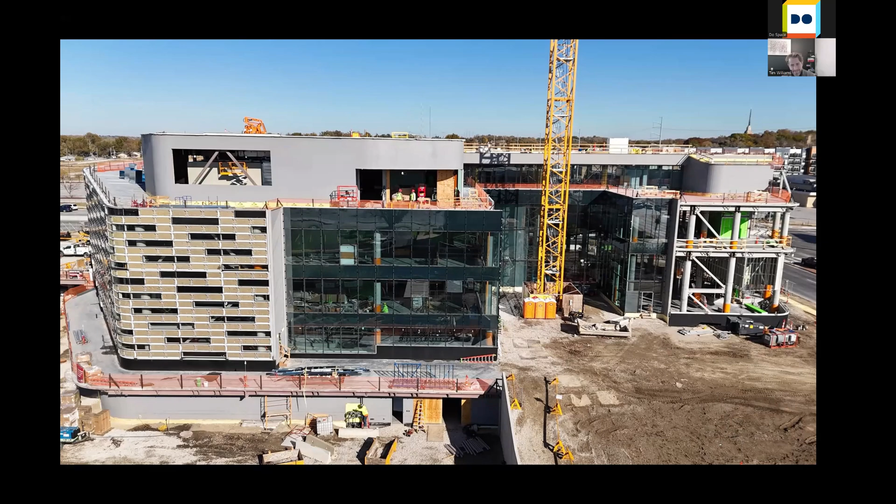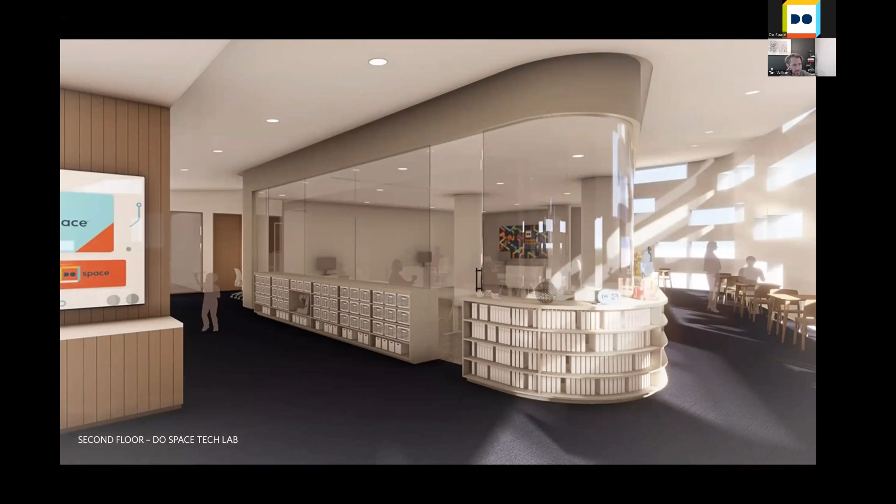I just wanted to finish with a photo of DoSpace's future home, the maker lab here in the center, which I think is going to be an awesome space. Really excited to go in there and see what you guys got.

I also should thank the rest of our team - this is not just myself and Michael doing the whole project, but a huge team that's been involved. The Omaha Public Library Foundation, the City of Omaha, and DoSpace have been huge members of the team and really great to work with. Really enjoyed the process. APMA has been the interior designers, Margaret Sullivan's studio is the library master planner, Kiewit is doing the construction, and Rainwood has helped us as the client advocate, client representative for Heritage Omaha, who's been leading the fundraising charge on the project.

Hopefully you've learned about the challenges we face as a society, some of the strategies and mitigation we can do to address it, some introduction to LEED, and how we've begun to implement it on the library. Thanks.

Thanks, Tim. That was amazing. I learned something - I kept hearing about LEED, but I wasn't sure exactly how it worked. It was great to hear.

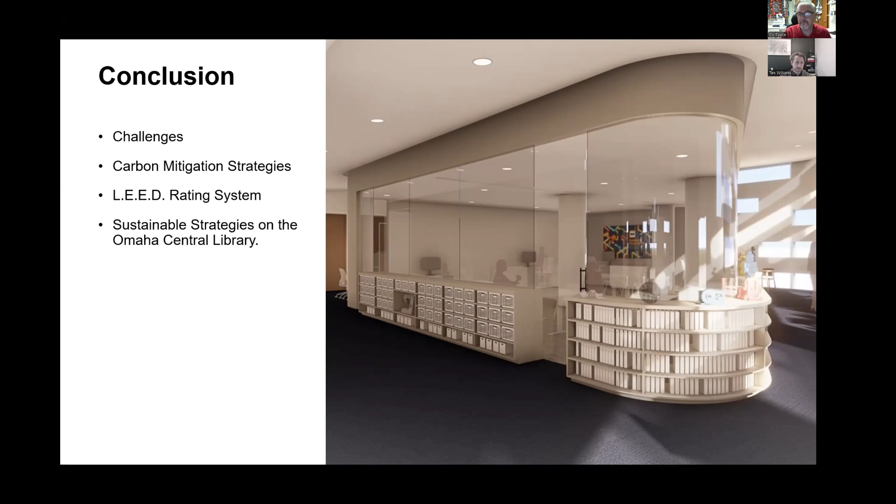I will admit I was not familiar with the floor-based heating and cooling also, but Don followed up with: but doesn't cool air fall, not rise?

Yeah, it does, but if it fell from really high, it would heat up by the time it got to you. So by having it pressurized - the floor, this raised floor system is pressurized - so it is shooting air out. I don't want to say it's a huge velocity, but it is projecting cool air out as you're going up.

So an HDR employee asks two questions: one, are we looking at platinum? Are we going to be close to that, or is gold going to be what we can pull off? It's probably gold, because there's a lot of like - why doesn't every project just do the most?

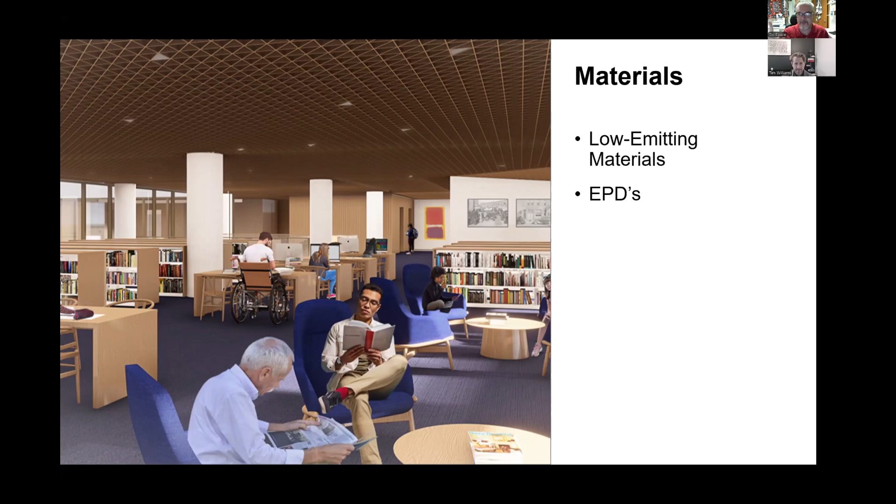I will say too, when you started showing pictures of the construction, we were getting a lot of hearts and wow faces coming up in the emoji system. I need to update my laptop's wallpaper to a more recent construction drone picture. I'm gonna have to ask the folks for one of those.

I've been watching this thing, and I just start talking about it, looking at these pictures, and I get goosebumps. I've been involved like this, I'm a librarian by training. This building is going to be amazing. Tim, thank you for all the work that all of you folks have put into this. It's been awesome.

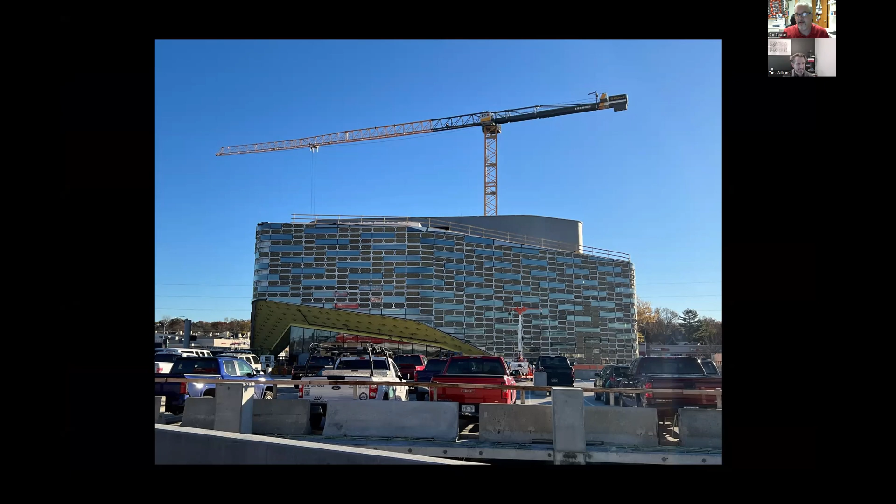Thank you for sharing. I don't know if anybody on the call was involved, but we did dozens upon dozens of community meetings and stakeholder groups over the years. If any of you attended any of those, every single comment you made got read. I read most of them myself, amongst everybody else, and we really tried to take everybody's input and opinion into the design of this building.

One of the biggest things that was requested was meeting rooms. We're going to have 19 bookable meeting rooms, something like that in this building, including a 300 seat dividable room for large events. So we've listened, we've consulted, we've evaluated, we've budgeted, we've done all those things, and this is what we're ending up with.

The goal right now is we're on track for a spring 2026 opening. Stay tuned. I'm excited, it has been an awesome process. I didn't mention, there's so many things I cut out of this presentation, but the engagement has been a huge part of it.

We've also been involved with a national group from other library organizations that have been reviewing, and we've been meeting with them, talking about the project. We've gotten a lot of great response from people all around the country talking about this project. So this is going to be a huge thing in the entire library community, not just in Omaha. I'm excited to be involved in such an impactful project.